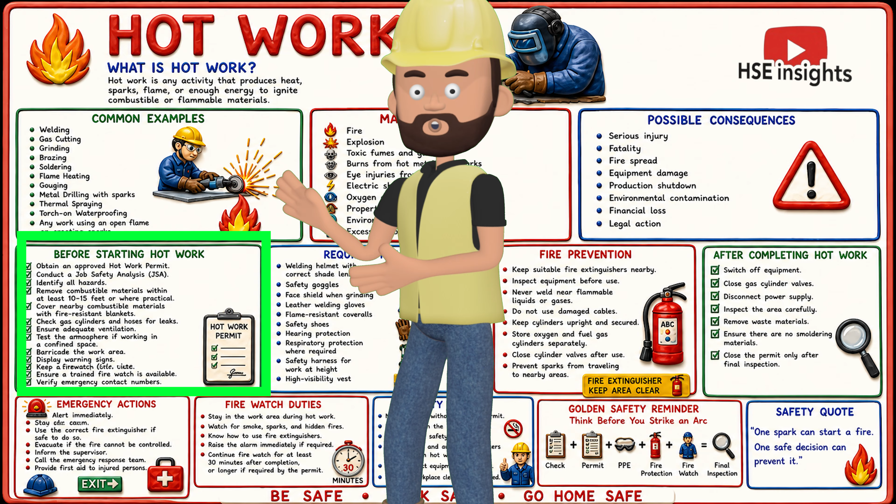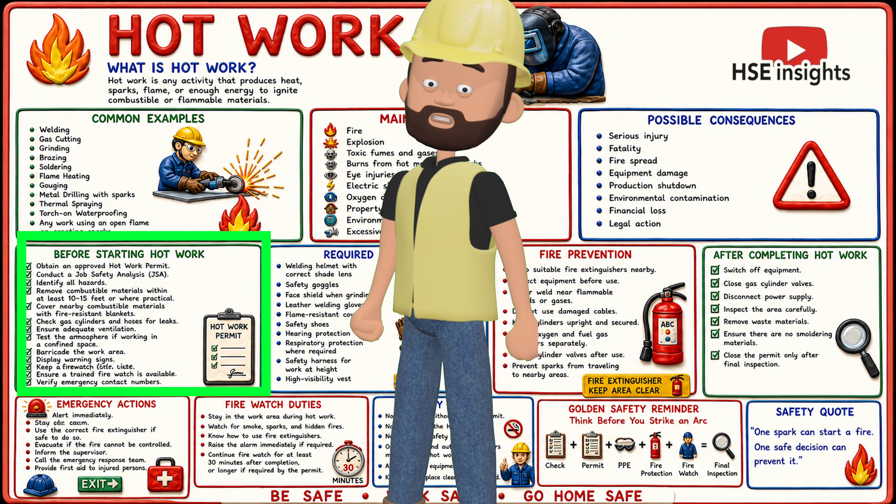7. Ensure adequate ventilation. 8. Test the atmosphere if working in a confined space. 9. Barricade the work area. 10. Display warning signs. 11. Keep emergency exits clear. 12. Ensure a trained fire watch is available. 13. Verify emergency contact numbers.

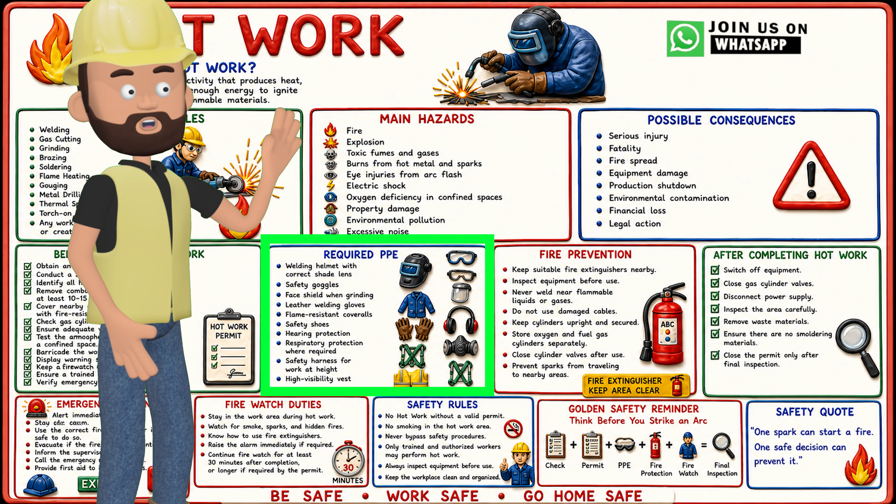Required PPE. All personnel involved in hot work must wear the correct personal protective equipment, including a welding helmet with the correct shade lens, safety goggles, face shield when grinding, leather welding gloves, flame-resistant coveralls, safety shoes, hearing protection, respiratory protection when required, safety harness for work at height, and a high-visibility vest.

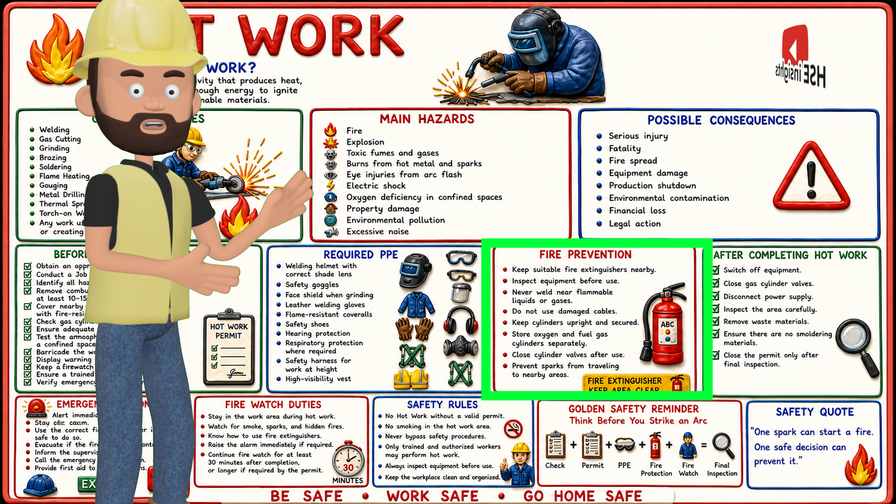Fire prevention. To prevent fire during hot work, keep suitable fire extinguishers nearby. Inspect all equipment before use. Never weld near flammable liquids or gases. Do not use damaged cables. Keep cylinders upright and secured. Store oxygen and fuel gas cylinders separately. Close cylinder valves after use and prevent sparks from traveling to nearby areas.

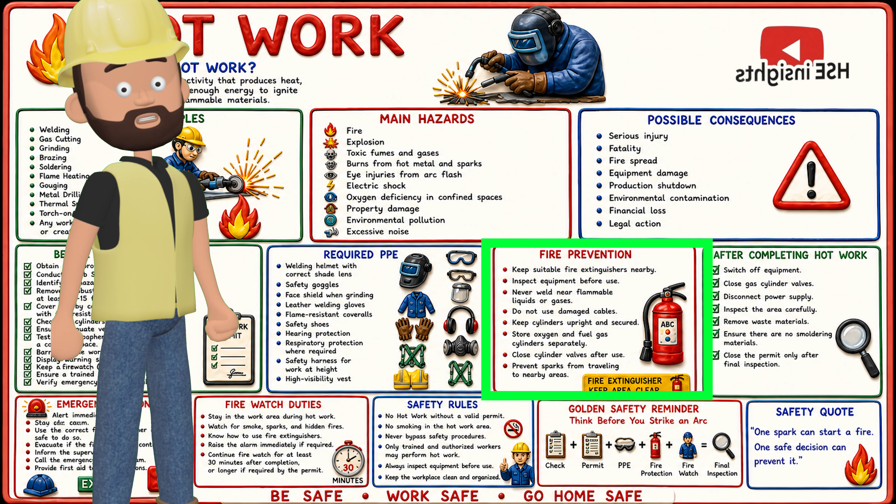Fire watch duties. The designated fire watch must stay in the work area during all hot work. Watch for smoke, sparks, and hidden fires. Know how to operate fire extinguishers. Raise the alarm immediately if required, and continue fire watch for at least 30 minutes after completion or longer if required by the permit.

Safety rules. Remember these non-negotiable safety rules. No hot work without a valid permit. No smoking in the hot work area. Never bypass safety procedures. Only trained and authorized workers may perform hot work. Always inspect equipment before use and keep the workplace clean and organized.

Emergency actions. In the event of an emergency, stop work immediately. Sound the alarm. Use the correct fire extinguisher if it is safe to do so. Evacuate if the fire cannot be controlled. Inform the supervisor. Call the emergency response team and provide first aid to injured persons.

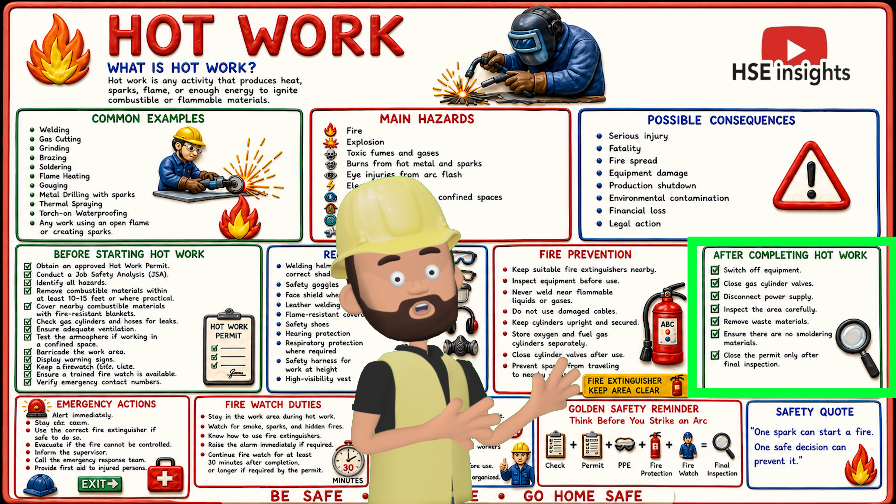After completing hot work. Once hot work is complete, you must switch off all equipment. Close gas cylinder valves. Disconnect the power supply. Inspect the area carefully. Remove all waste materials. Ensure there are no smoldering materials, and close the permit only after the final inspection.

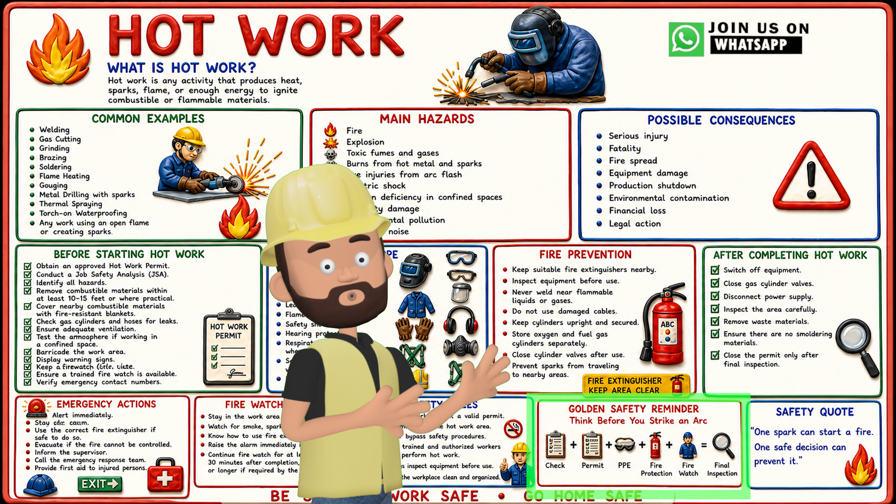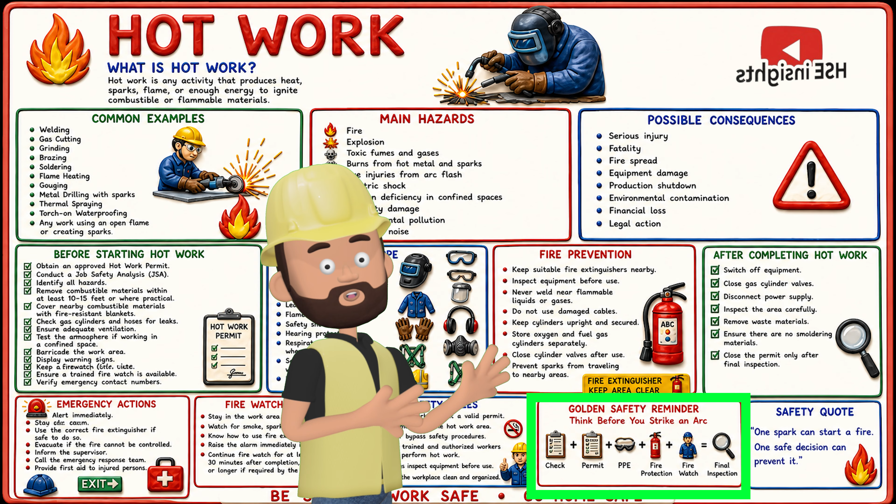Golden safety reminder. Think before you strike an arc. Check: permit, PPE, fire protection, fire watch, final inspection. These steps are your formula for safe hot work every time. Remember, one spark can start a fire. One safe decision can prevent it. Be safe, work safe, go home safe.